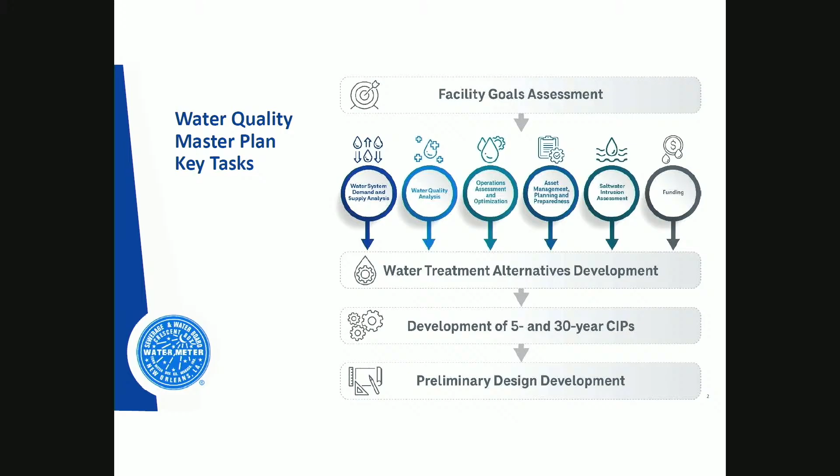That is near completion. And then part of their task, which is going to extend out probably through 2026 for CDM Smith, is to help us with some other preliminary designs that we choose if we need their assistance to kind of help guide us towards, hey, there's something we want to do, for example, with the lime systems, if that's how we want to move forward with it.

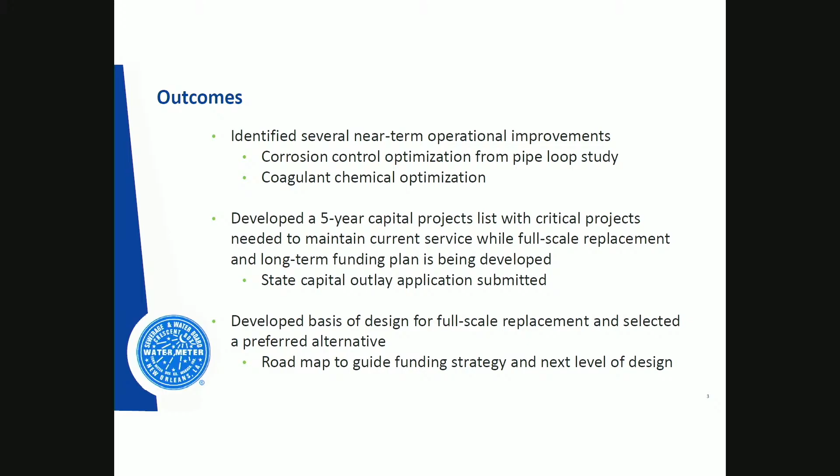We've already identified a lot of these things. I know Steve had brought the pipe loops to this committee before about corrosion control and how we can optimize what we do with the plant, and then develop the 5-year capital programs, like I said. The roadmap is going to be challenging because of what we need to do overall.

But going back to the pipe loops, in the laboratory upstairs of the Carrollton Water Plant, we set up 24 different pipe loops to study what effects increased chlorides had on actual lead service lines and different materials. This was mostly in response to the saltwater intrusion event we had a couple years ago, and how those things would have impacted us, because that was the unknown at the time, right?

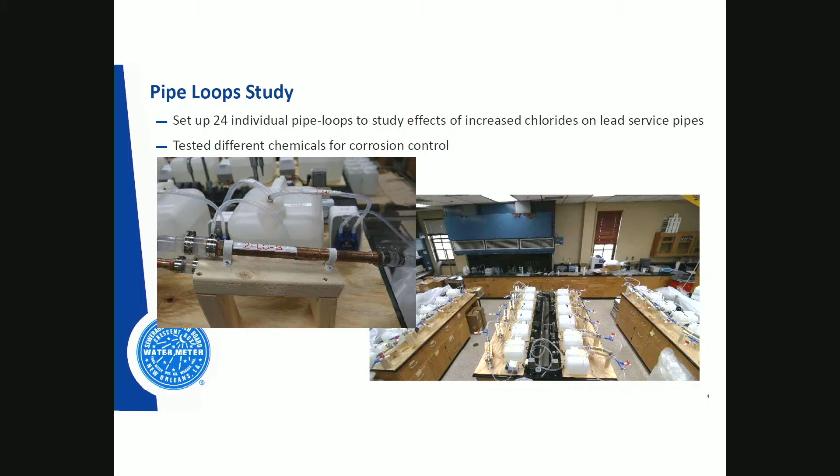If chloride levels increased in the river, what happens to our lead service lines, among other things, but that was the big unknown. That's not something that there's really a big test case for in the country. It was a bit of a unique situation for us. So we are able to test different chemicals and what those responses are.

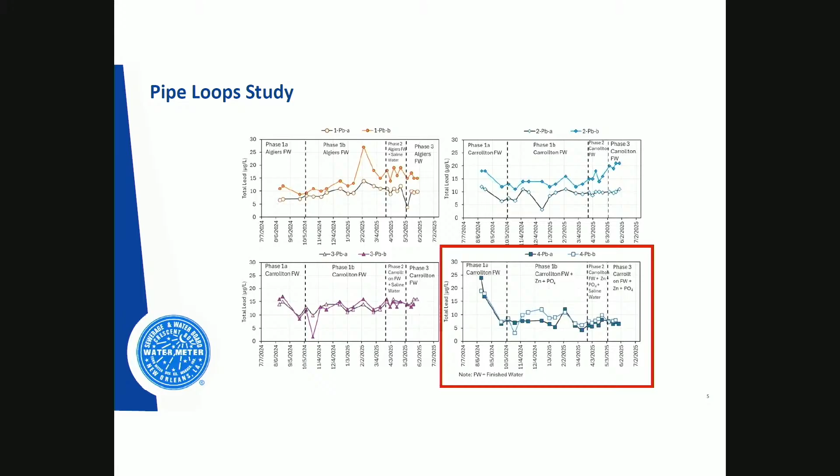The transmittal that came back from this had a lot of graphs. I'm going to focus on this one that I highlighted here because it goes into the addition of zinc orthophosphate. I know this graph can look a little scary because the numbers are very high at the start. There's a big asterisk there that it starts very high because we just disturbed an actual lead service line, right?

That's the biggest trigger for an increased lead level on a test - if you disturb the lead line, lead's going to be in the water. So you needed a couple months of a baseline for that to come back down, and you can see it jumps around. And the big initiative that is getting recommended is the addition of zinc orthophosphate. You can see that in phase 1b where it kind of stabilizes after a few months.

So the way zinc orthophosphate works is it creates a bit of a corrosion barrier. It creates a coating inside the pipe, but it takes a long time to start activating and building that. You can really tell - these graphs ended after the middle of last year, but if we continued it a little bit longer, it really stabilizes.

And you can really tell that what was important about this test is after adding the saline water, increasing the chlorides, it didn't jump up dramatically. So again, this is in a bubble, right?

This is one pipe loop. It doesn't actually reflect necessarily what we see in our system. So seeing these numbers jump above the 10 micrograms per liter level is not an alarming thing for us when you talk about the entire system, but it's really just a test case to prove that zinc orthophosphate can help stabilize that.

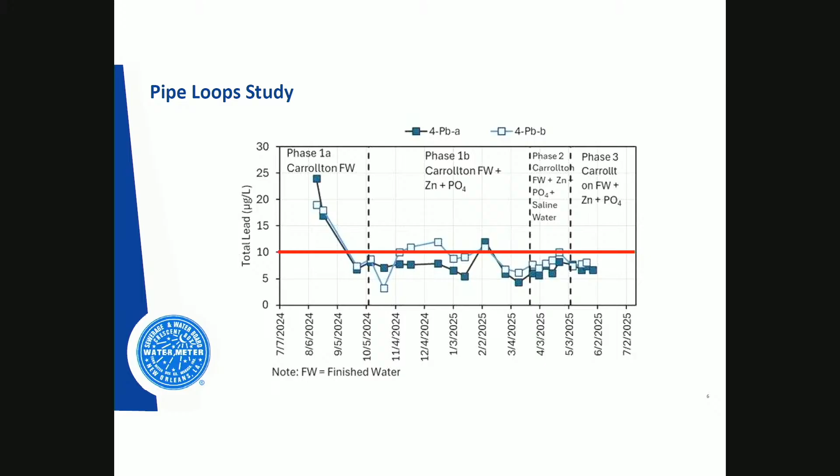It would be an additional chemical to our existing corrosion control, so the good news is we're not an early adopter for this chemical. A lot of utilities use zinc orthophosphate, it's very widely used, approved by EPA. But the costs are fairly dramatic. In Algiers, it would not be that impactful at $115,000 estimated, but $2.2 million yearly for our Carrollton treatment plant for additional chemical costs. So that's just something we have to budget for.

There's no return on it in the short term. It would be a long-term benefit if it helps us prevent breaching that action level in the future. So there's almost like undefined benefits there.

Did we investigate switching strictly to zinc orthophosphate, and then we could do away with the chemical we're using now, or would it be a swap? Oh, so it wouldn't be both going forward? Yes. We're already adding orthophosphate, so this is a different concentration, and the addition of zinc is what helps create that protective barrier. So we're already doing corrosion control, it's a supplement to what we're already doing. I see.

I do just want to reiterate that this is very much a proactive, forward-looking measure. We are not exceeding the regulations either presently or in calculations for the future. I just want everybody to be very clear on that. This is something we would be doing as a proactive measure to reduce the potential future risk, particularly in the event of a saltwater intrusion event. So just to be clear on that.

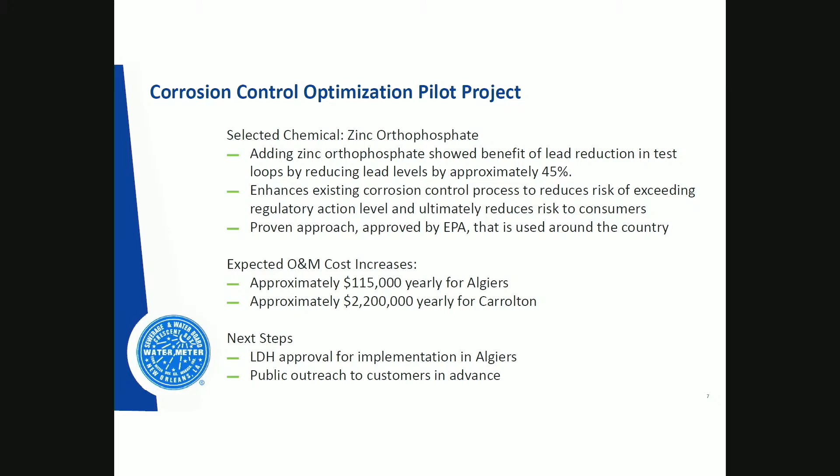All right, I did want to make a note. We've talked about public outreach, and our team is working on that. I don't have anything of our own to share right now, but wanted to put some examples of what other utilities have just straight up on their website. So Providence Water and Pittsburgh Water have been doing this for some time, and they have a lot of information. So, public website, updating our website, doing some press releases, some public campaigns. We want to make sure everybody's very aware: this is safe, this is not changing the safety of your drinking water. We want to make sure everybody's aware of the situation. So we'll be making sure we have a robust messaging campaign around that.

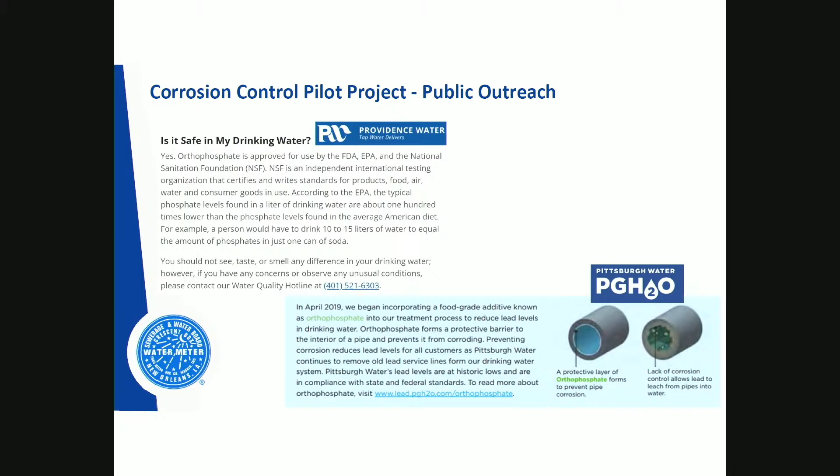Yeah, that's great. I have a video from a utility in Canada, I think, that uses orthophosphate and shows the concentrations of it in different food items and things like that. So I can send that to you as well. Yeah, like Providence, I have an example of 10 to 15 liters of water equal to the amount of, like, 1 can of soda. It's really useful.

All right, so as I mentioned, the main objective of this water quality master plan was the development of these CIPs. The short-term one was developed, we had it in our 2026 capital budget. The 30-year was more focused on the treatment plants themselves. It's a 110-year-old facility, so what do we do over the next 30 years to start pivoting that, because it's inevitable at this point. So what they did after their full analysis of the entire plant, all the equipment, everything, came to us and brought us 5 alternatives for different options of processes and how to do it within our existing footprint.

One of the things that was noted was that our sedimentation process is frankly not big enough as it is, even though those of you who've walked that plant know those sedimentation basins are enormous. They're still not quite to the size that they should be for our level of treatment. So that was, for example, one of the alternatives. Instead of going to traditional sedimentation, there's other options. There's a technology called Actiflo, which has a very, very small footprint, and plate settlers, which is another passive-type alternative.

So they brought us all these, and a layout of the plant of how that would look and the phases to get there, and then the different filtration options we'd have, because those post-disinfection options change based on how you start the process. So as we went down the line, it did kind of cross out some options as you make a selection on the first part and move forward.

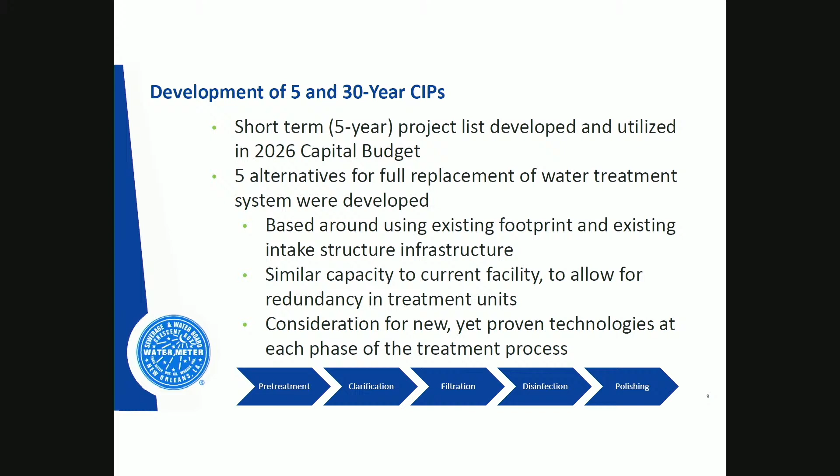So we were brought these 5 alternatives. We had a scoring process based on all these different categories, and we got to weigh what was most important to us. Treatment performance was, frankly, every treatment option brought to us gave us the performance we needed, it was all going to give us the proper water quality in the end. But what was important to us, and especially to operations, was O&M costs and then reliability and maintenance moving forward.

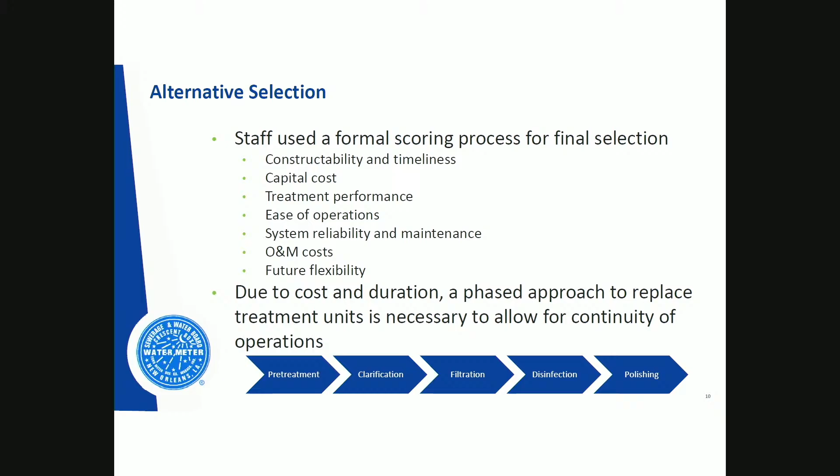The capital cost was important to us as well, knowing the reality of trying to fund something of this magnitude, which is ultimately going to be over $1 billion. A phased approach was going to be necessary. Let's start with the first part being the sedimentation, which some of us believe is at highest risk of failure at the moment, then move to the next part, and the next part, crossing that bridge as we get there.

We selected the alternative for plate settlers. It's a faster pretreatment than what we have right now, and it has a smaller footprint than we have right now. That's important.

The challenge ultimately will be, how do we build a facility of that size? Even though it's smaller, it's still going to be large, and we still have to keep our existing plant running. That's going to be the biggest conversion point here, because you still have to use the downstream parts of it to do that. So there will be some reconfigurations of the Carrollton plant.

Right now, our goal is to put out an RFP to solicit a designer this year to start this pre-design part. What CDM did as part of this task was more of, here are the technologies, here are your options to fit them in based on it, but it was a very high level estimate and idea behind it all.

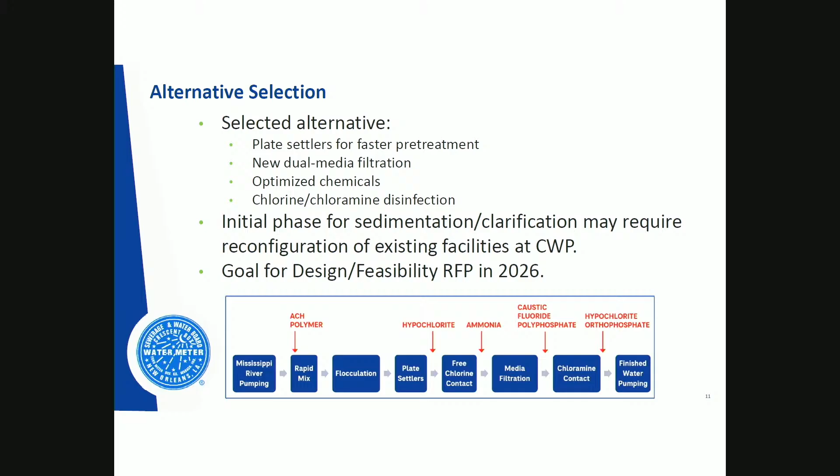By reconfiguring it all, you end up having a much smaller footprint on sedimentation and pretreatment, allowing you to use the rest of the existing facility to build a new filter gallery on top of that, so that you can keep your existing filter galleries running. We can keep our existing contact basins in place while that's being constructed.

So once we get past that sedimentation pretreatment phase of the new construction, future phases should be a little bit more - I won't say easier, but a little more tolerable - in that you've gotten past that first stage and now have some breathing room from a site standpoint.

So you would be flipping it, so you would do sedimentation, then filtration, then contact basins? That is the alternative we selected.

So then in the final product, the contact basins are covered. So that you wouldn't have to do the filtration afterwards? So you wouldn't have to, right. There are some caveats there - we have to ensure that we're not...

Right now these current basins have to be uncovered because we have to dredge them - because they're pre-treatment, pre-filtration. We know there's some lime dosing going in there as well that we have to get out. So post-filtration allows you to cover them completely, because there should be no extra sediment getting in there.

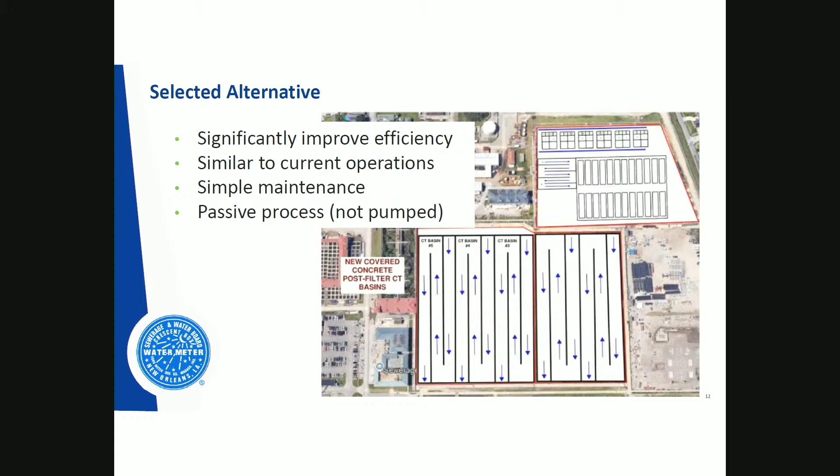So for 2026, what we talked about, we do need LDH approval to start implementing zinc orthophosphate. We will start with Algiers and then move over to Carrollton, because Algiers is frankly a very small initiative, especially a tote and pump, dosing pump.

Part of the master plan also highlighted some efficiencies we can do for the coagulation process and reduce our need for lime for pH control. That would be using ACH to replace the ferric sulfate we have. It ends up being a much smaller dosing, which reduces our need for lime, which we've seen has been getting into our contact basins. Hopefully we can make that change over the next couple of years.

This also requires LDH approval. Is there a cost difference, or is it just sort of offset? It would eventually offset. So essentially what you're doing is swapping over a year's period, and then you can start reducing your lime as you see it needed.

I'd mentioned the RFP for the Carrollton Water Treatment Plant design feasibility study, and then this 5-year CIP. I know it went over that quickly, but there's a lot of items in that 5-year CIP that are, I'll say, urgent. So this is more the things we need to stabilize the plant and continue to operate, rather than new things.

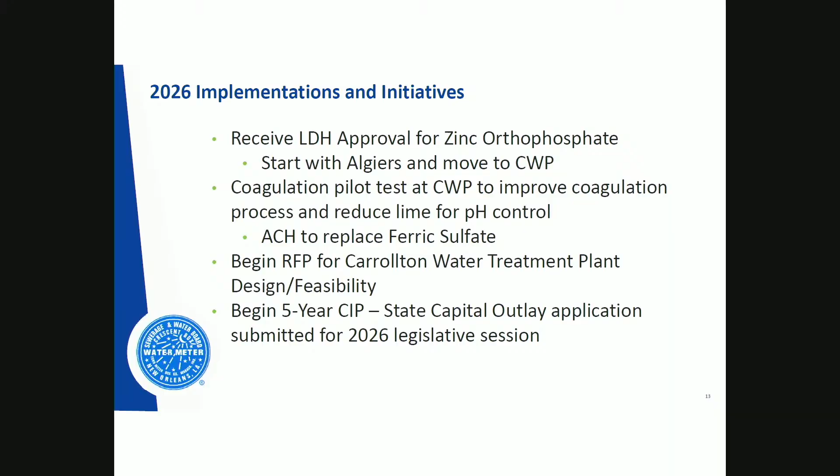You done? Questions? Yeah, before we end on that one, I think I'm understanding that this was less a formal plan document that was produced and more a series of documents that the consultant provided. Is there a plan to put those into a single document that we can adopt as ours? There is.

Even though the alternatives have been selected, we've got our final transmittal for the alternative we did select, that still builds into the 30-year CIP. So that is not quite done. I expect that to be done in the next month for our internal staff review, and then it gets finalized into a final transmittal document. Once that's done, that functionally completes the plan, and they will create an executive summary, and then we can package it all together and formalize it and publish it.

Great. So that'd be maybe beginning of Q2? Probably summertime, I'd say. Because ultimately it's those 2 documents, a CIP for 5-year and 30-year, referencing all the other transmittals that help build into it. And then the plan itself stays, we'll probably bring an amendment to extend out to the end of 2026. Even though the plan would be done, those pre-design items are still available to us as a task order for them.

And then the pipe loop study, I know there was some work about that with the Water Research Foundation and other partners. Is that complete or is it still ongoing? I believe that work is still ongoing, and Chad can correct me if I'm wrong, but these are multi-year projects that the Water Research Foundation is doing. We are participating, I believe, in at least 2 that will be sharing our data and can help nationally.

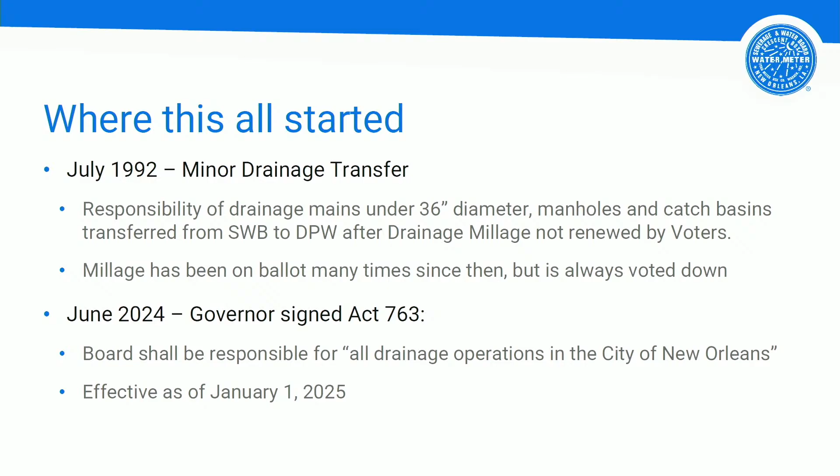Then coming into 2024, the governor signed Act 763, which brought back the minor drainage system to the Sewerage and Water Board, effective as of January 1, 2025. I have to point out that on January 1st it was pretty hard line for DPW — they were very happy just to say it's yours now. Everything was just given to us, and they closed the books and were done with it.

Our new responsibilities: we received 1,600 miles of these smaller drain lines under 36 inches in diameter, 50,000 drainage manholes, and 76,000 catch basins. The existing responsibilities we had were the 210 miles of closed canals 36 inches and above, and the 65 miles of open canals.

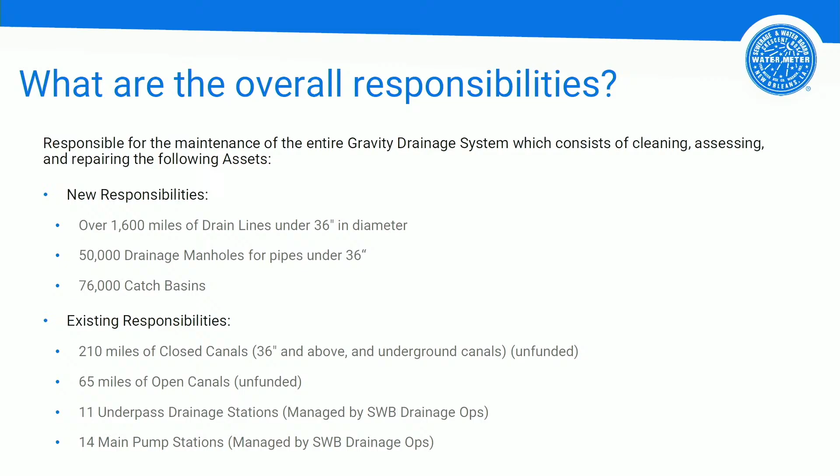Those are both unfunded — we haven't done much in that area either. We have the 11 underpass drainage stations and the 14 main pump stations, and those are managed by our Drainage Ops Department.

DPW transfer engagement — I'm trying to follow the format you put together to answer your questions. We received 9 flush trucks, with 5 of them being functional. We didn't receive them until early March, and those were 4 Vacons, not too old of models, but fair condition is putting it nicely. We've had to put a lot of maintenance into them and furnish them up with all their tools. The Vactor is a good working truck.

It's actually in the shop right now. If I had to say something why I only have two crews working for me right now, it's because our equipment is not very reliable. So I only have one vac truck working as of today. Hopefully by the end of the week I'll have 3. So it's a little tough.

Inventory received includes catch basin assemblies, drainage manhole tops, and inlet grates. We put in our capital purchase for this year, and the only thing we really got was a crane truck. So we're using the crane truck to go get the inventory from DPW. Support Services helped me out a little bit with grabbing some of their inventory.

Part of their ARPA funds, they had $10 million. They spent about $7.2 million, I think, on cleaning, and the rest in engineering, but $100,000 was put aside to purchase catch basin assemblies. So we're grabbing all that. We've been doing it pretty solid for about a week now, so we're really kind of filling up our yard. I'll have a final count on what we've received probably in about a month.

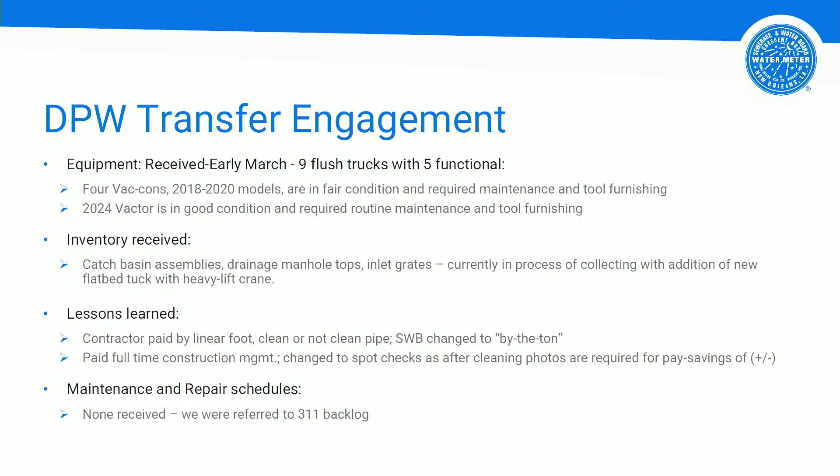Okay, so quick question. At what point do you all speak with legal to make sure that our standard, in terms of the contract, moving from the linear foot model, is set, so that we have a standard when it comes to RFPs that go out?

Or are we doing this? We didn't meet with them internally, we just did it within my department. I mean, legal sees what we do, but I'm not sure if they were aware. Before the contracts are executed, it goes through legal. I'm not sure if they were aware that I changed the format. I might have told them, but I just want to make sure we're connecting with legal, so that going forward, this is a standard.

Mary was very heavy at the time into the transition. Okay, so yeah, I guess you probably saw that. We pretty much, the departments pretty much connect with us when we are doing things of that nature. I'm not sure if I'd mentioned at one point, but they look at the whole contract.

So afterwards, was there any pushback once you changed the terms, or were these new contracts going forward? We had an RFP out, so anyone bidding on it knew what our terms were. So there were no issues there at all.

And then the reduction of the construction management, that's new in our RFPs? That's on the engineering side.

And we'll look further down, it depends on my funding this year. Actually, that'll be in-house, and I have a construction manager in my department now, and he'll just spot check internally with us. Okay, thank you. Good questions.

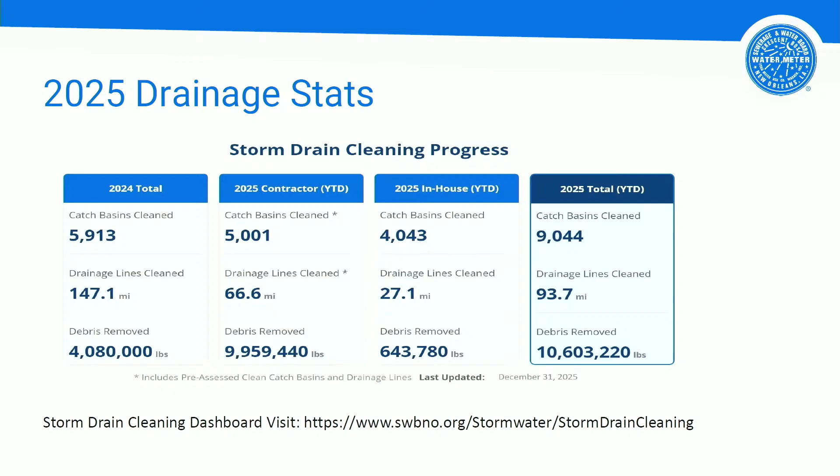We cleaned 6%. What was theirs? Almost 11% when you look at their drain lines cleaned. So together, the 2-year total is about 17%. So in 2 years, we haven't met the industry standard. The goal is to meet the industry standard, right? That's the goal, yes, absolutely.

Yes, and that's our goal. It all depends on the funding, how my routine goes. But of course, I'm going to try to go back through the areas as I finish 100% of the system. I'm going to go back to what I started first.

How quickly do I do it? Current schedule, I'm doing it every 13 years. It needs to be every 5 years, 20% a year. Previously they had PSAs going out talking about residents cleaning their own, and it's just like, what is the actual schedule of maintenance?

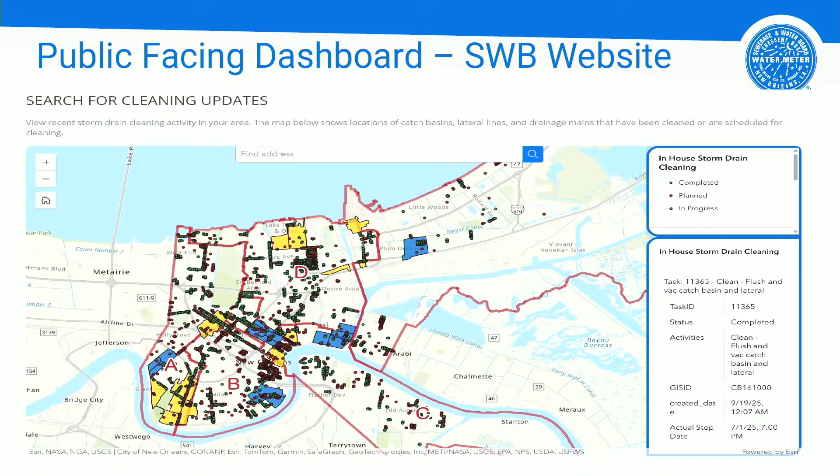But I understand what you're saying. I think it is important to note, though, that it's still important for residents to clean in front of the catch basin. I try to keep mine swept every time I see leaves or trash in front of it, because the more stuff you can keep out of it, the less often we need to come in and open it.

Because if you told me clean my catch basin -- oh, do I get in the curb, that's the gutter, that's cleaning the gutter. The catch basin, we're never gonna come out and say, okay, clean your own catch basin. That's too much of a risk for us. But cleaning the curb, yes.

Gotcha, and picking up your grass clippings. Plus, you would not be able to lift. Yeah, really, that's actually a really good point around the community engagement. I know the time that I've been here, I don't recall any push or nudge or flyer that says, hey, remember, you need to get out there and clean it. So maybe there's some low-hanging fruit there to get community engaged.

I actually have a strategic question. Any particular strategic risks presented by this consolidation that didn't exist when these two entities were operating, or this was sort of split? Not that I'm aware of, no. I think we only see opportunities, right, at this point for us all to have the entire drainage system under our roof.

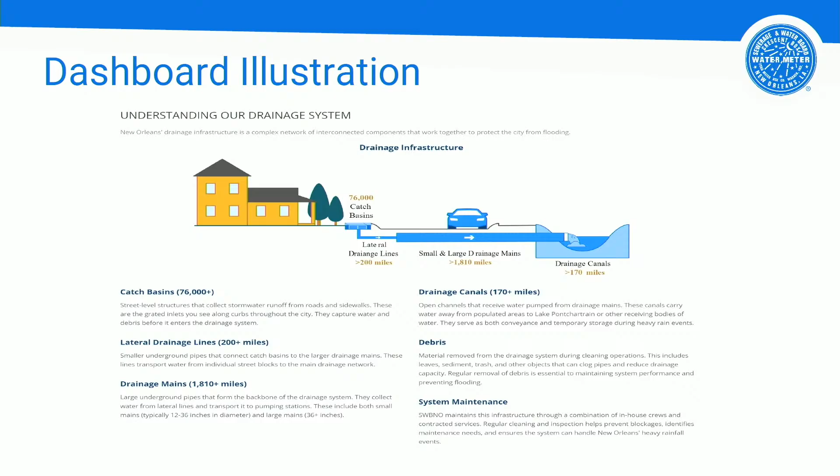Yeah, and I think to that end, as we're advancing the complexity of the program we're creating, we could start thinking about certain times of the year -- for instance, when the live oak trees lose their leaves -- to send out a bill insert or an electronic notification to customers on the portal saying, hey, right now is a really good time to sweep in front of your catch basin. We've discussed that.

I received that one-time CNO ARPA payment, I believe that was in March. And then in April, I didn't start receiving funding from the IMF until April. Important to note that. The contract for CS is $9.3 million, so I was putting out smaller couple $1 million work orders at a time as I received money.

So we did receive the one-time CNO ARPA funding, but originally I thought I'd be having $18.9 million. In May, that was revised. The traffic cameras came down.

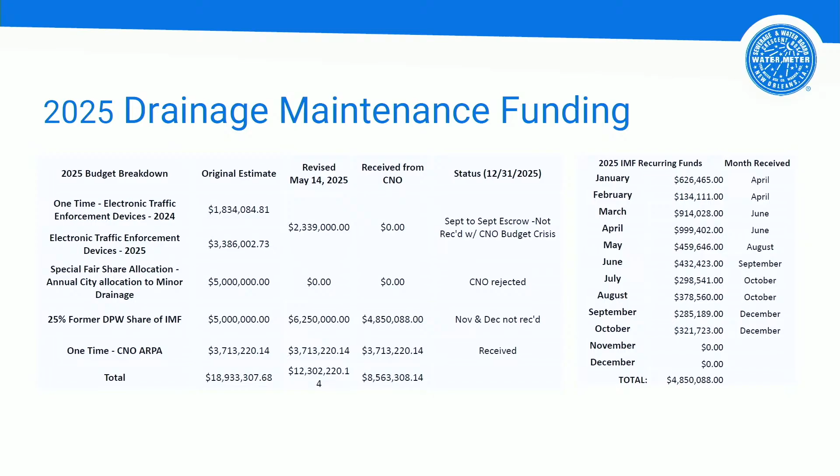Okay, so received to date, roughly $8.5 million. Let me go to our expenditures. Salaries spent to date, with the contractor for cleaning, is roughly almost $6.4 million. I have $7 million in work orders out there, but I've stopped them at the moment. The contract is for $9.3 million, and it's an RFP, so I can fluctuate that.

Contractor repairs, I'll talk about that now a little bit, I have a future slide on that. $750,000 for consultant All South, we spent $500,000. Consultant IC Change, $123,900. Capital would be my lift truck and some other Zoom camera and other pieces of equipment. Other O&M spending, it was pretty pricey fixing up the vac trucks, a lot of repairs to the vac trucks.

So income IMF, income ARPA - I've expended to date 8.8, income 8.5, so I'm in the hole right now about $246,000. But I haven't received the November and December funds yet, and that'll take care of that. Then we'll take it from there to see when I can start the contractor again.

Funding scenarios - I just kept the $8 million in there, that's kind of what I see this year, what I'm getting this year. Then looking at if I get $10 million - industry standard is that third line, in-house plus contracting percentage. If we're looking at industry standard, if you go down to the 20 million and 25 million, that's when I get in the area of providing the industry standard.

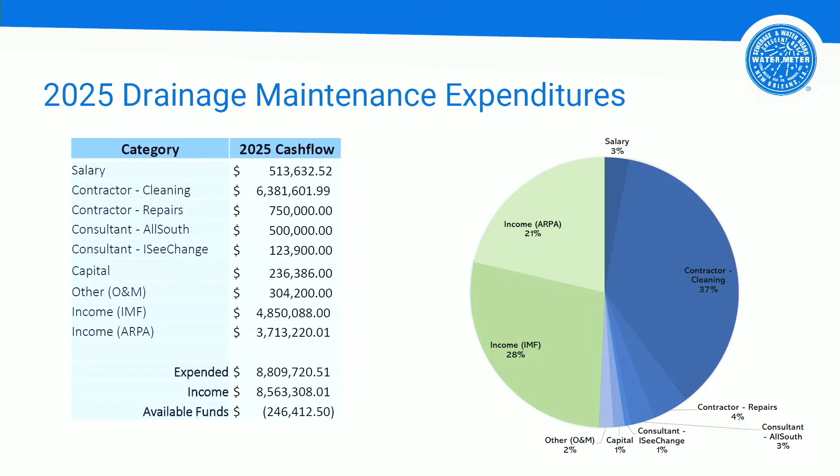Yeah, and it is good. Obviously, the way I look at it, I have 3 engineers myself on staff, we can do more. I think it'll get better, our numbers even look better as we get more equipment and stuff. I don't need to add more engineers. Right, and that's what I'm saying - if you go to the next slide, $1 million worth of contracting equals 1% clean. But what is the price for the 1% for the in-house cleaning today?

Yeah, and it shows 1%, and actually we're hoping that our crews are efficient enough, and as they get better at it, they're doing 2% a year per vac truck. That's our goal, and that's actually the in-house goal. If you want to be an operator 4, they're currently operator 3s, you need to show me the 2%.

So that brings up an important question I wanted to ask real quick too, about as you're building your team - are you finding that you have the classifications necessary for all the work that you need to do? We've worked it out, we've done all that, looked at creating new job classifications.

Yeah, we've gotten it done. Javier's done a great job on that side, that was on his end, and if he was here I'd have him talk on it. But we're set - we are in a good spot, we're ready to move, we're ready to put people in.

We just need the funding, and we can get the people. There's been people that I've had to say, I'm sorry, I don't have the money to hire you - some good people. There's a couple of people at CES that wanted to move on, they wanted to come on, good equipment operators. I just can't pull them in, and then they're sitting around doing nothing - I have to have equipment for them. So I think I can still find people, it's tough to see the good people because it's very hard to find the good people. I won't go into all that about how tough the hiring is, but I can still find them.

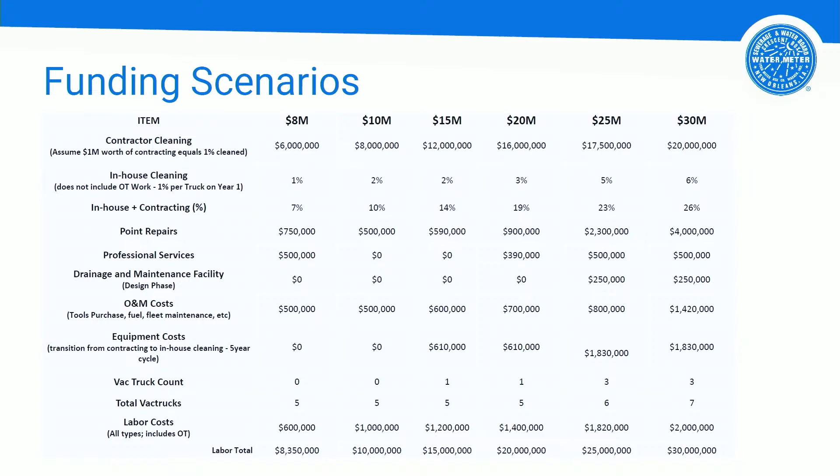I'm running long, so let me run through drainage repairs. I spent $750,000 on point repairs. I originally had this money put in place because I had performed a lot of inspections in the major drain lines and the bigger box culverts.

From my opinion, the number one issue with the drainage is at that point where the minor drainage meets the canals. What happens is our major canals, our big canals, are pile supported, so they don't move. The pipes coming into our canals are not pile supported, so they're subject to soil differential settlement. Many of them have dropped out, fallen out, sheared off. That's why I had the $750,000 set aside for that.

I didn't complete one of those repairs, not one. What happened is safety issues took over - safety issues that DPW wasn't taking care of came to my plate very quickly. But I did complete 11 drain mainline repairs and 29 manhole catch basin repairs that were all safety issues. So that's where that money went.

A general note: as we repair pipes, this is going to reduce the frequency of cleaning, because within your equations for velocity, for fluid flow through pipes, velocity is a major factor. When your velocity slows down, those suspended solids settle, and that's what settles in the pipes. As you fix pipes, the velocity continues to move, so you keep moving the material. As we repair pipes, less cleaning will be required.

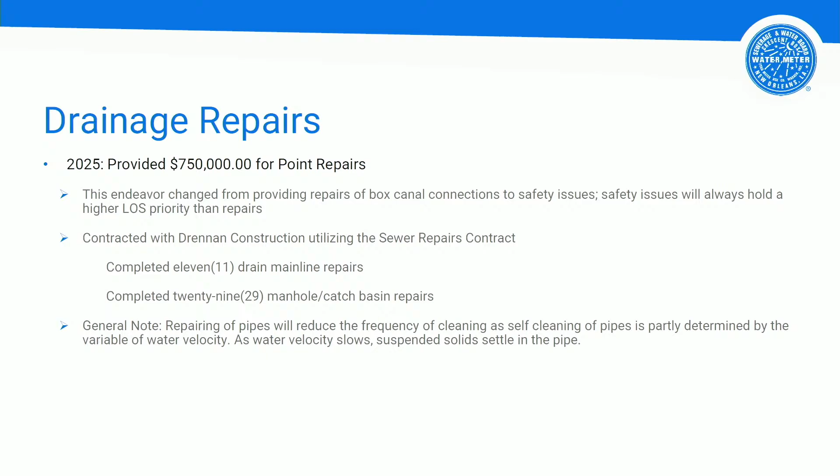So it's going to be really important in the future for us to really focus on cleaning the pipes. That's just a general note I had.

And how are you making the determination when cleaning is not cost effective and it's time to repair? That's based on our inspections - our Zoom inspections. I have a quick case study I'll run through with you.

Drainage maintenance department training - our vacuum truck operator training - we have a consultant, Nezat Consulting, that has these training videos, and it's 8 hours of training. They go through that, and then we do in-house training with some of the networks people. We also have them go out every now and then, and we'll start this up again when CES goes out. I'll have my crews go out with CES and look at the way they do things - proper nozzle selection, step cleaning, depending on the type of material or degree of debris in the pipe.

That last one, the repairs of catch basins, should have been in the flatbed operator training. We got a flatbed truck, which is really nice, so we've been replacing a lot of catch basin and manhole covers with that. That's really been great - mostly all safety issues.

Next month we'll start masonry work to repair the catch basin and drainage manhole structures. We're trying to get masonry mortar mix in a 5-gallon tub that they can just take to the site, put it on top of the catch basin that's already there, put the frame in place, put the top on - done. Big improvement, so we're working on that.

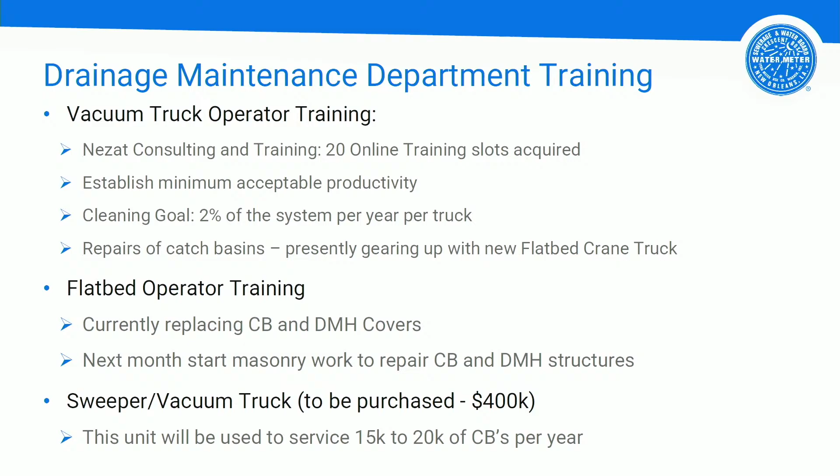We'll have that. All right, let's see, future expectations. I'd love to see us funding independently. I think we still take the IMF funds, but it would be really nice at the Sewerage and Water Board level to have a drainage fee. That's, I'm going to say, the only way we get to the monies that we need. Aim for the industry standard of 20% of assets cleaned yearly. Develop the KPIs with the new asset management system, key performance indicators that you asked about.

It's tough to distinguish the contractor costs and our costs right now. I think I could do a day rate, like what's the day rate, I could work on that. But it's pretty close to what we would see on the sewer side for cleaning, and we're always two to three times cheaper.

Citizen responsibility, that is cleaning 1.5 feet past the curb line, elimination of grass debris from entering the drainage system. I do have door hangers that are going to be made that my crews can use. If they go clean a catch basin that's really dirty, they can put it on the door.

Create a repair division within the department. That's future. Yeah, I actually have quite a good amount of people and networks that would love to do this work, and I'll talk to Steve about that at length.

Clean and repair the major drainage system, I'll show that in future. My hopes are, where this is all focused on the minor drainage system, I'd like to clean the major drainage system also. I did a lot of inspections in the major drainage system, probably more than anyone else, so I see the issues there. I dropped into the Claiborne Box Canal, the brand new one, last week, and there's 6 to 10 inches of material throughout already. Be nice to figure out a way to get in there and clean that.

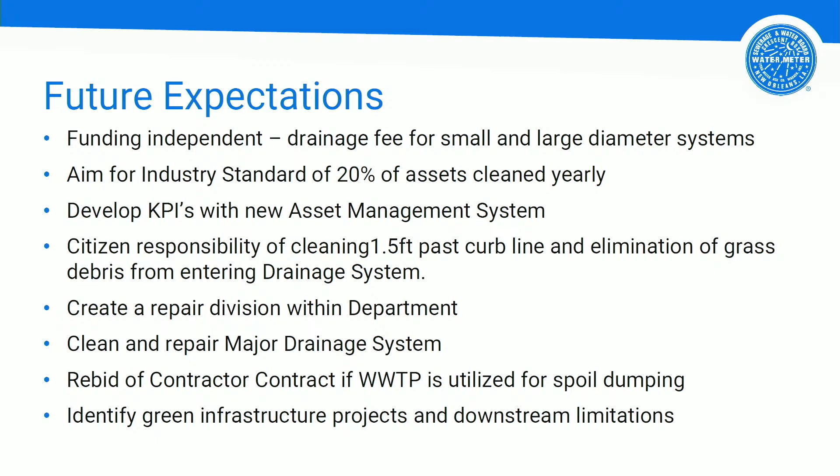Internally, we need to identify the green infrastructure projects and downstream limitations, like I talked about before. So I think that's important to do internally.

Dave, I just want to highlight that. I think that's one of those opportunities we were speaking of earlier, being able to take everything together and look at it as a whole system, right? Yeah, the whole flow from the catch basin to the pump station. So I just wanted to highlight that as one of those particular areas.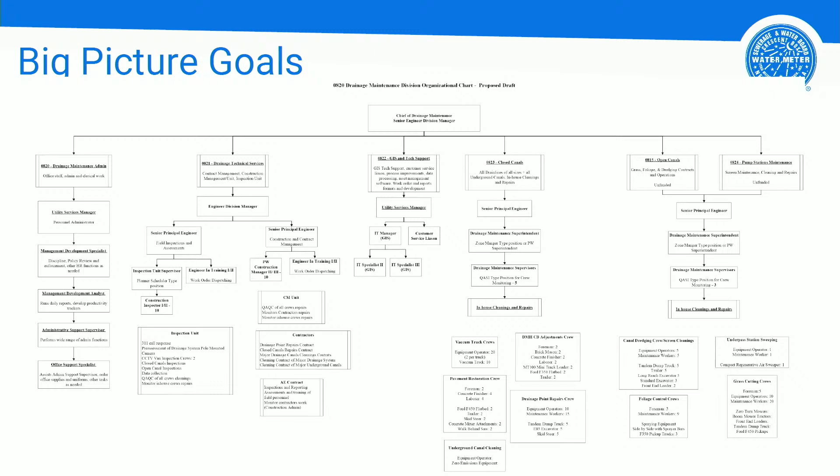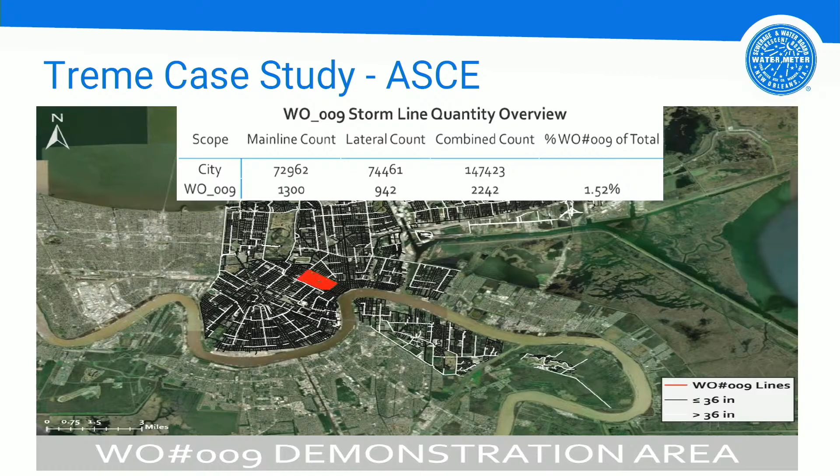Okay, hey, I know I'm running late, let me go through this real quick. We did a quick case study with All South Engineers. This is the Treme area, as you see in red, it represents about 1.5% of the system. They went through and zoom cameraed the whole area. What do we have, I wish I had a pointer.

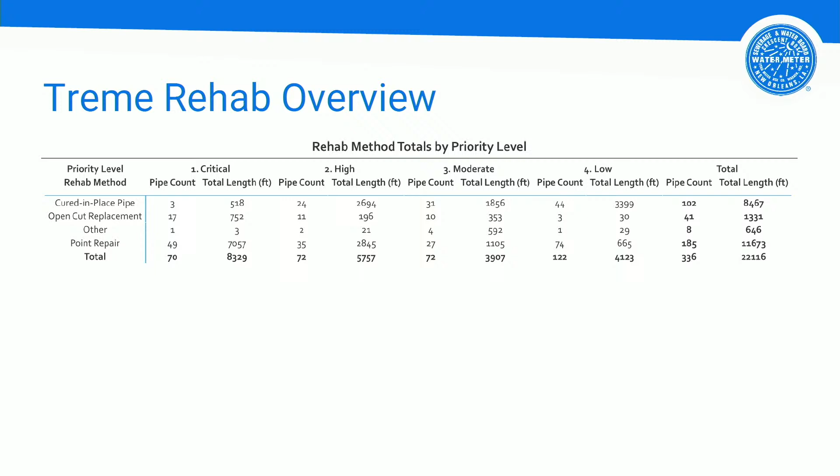You have critical repairs, high repairs, moderate repairs, and low repairs. Total repairs they've seen in this area is 336 total repairs of the pipes. Total length of those pipes is 22,000 linear feet. So this is damaged by pipe size and priority level.

And if you see the priority level, the pipe sizes are like the 8-inch, 10-inch, 12-inch, 15-inch, 18-inch, and then you have critical, high, moderate, low. Where I would start, if you see those 13 in the critical-high that are the 24-inch and 30-inch, those are probably my most critical because they're the furthest downstream. Probably start there, I'd have to look at it a little more.

Then damage by the pipe size also, and different types of damages: blockage, broken pipe, collapsed pipe, cracks, fractures, cross bores, infiltration, offset joints, partial collapse, roots, sag. There's a lot of different failure mechanisms there, and it's a lot to look at.

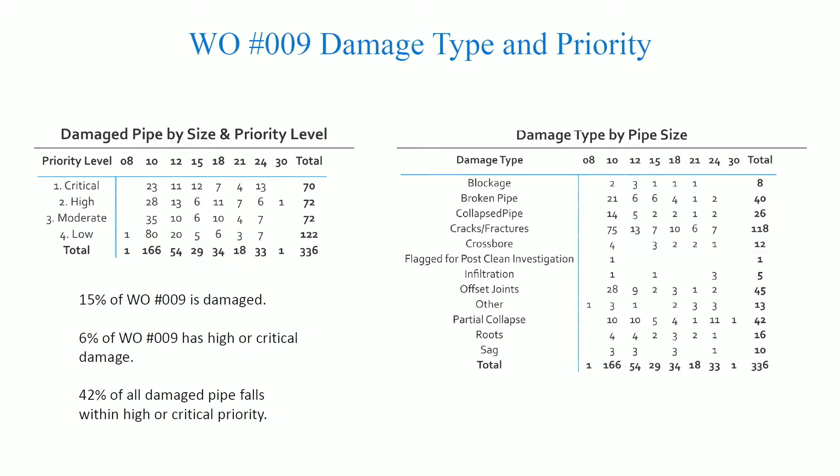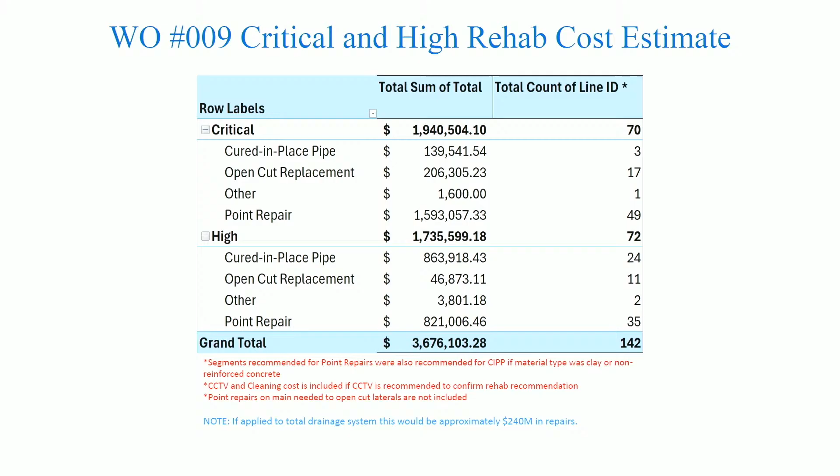15% of that whole area has damaged pipes, it's pretty big. If we looked at just the critical and high pipes, the total repair cost would be around $3.7 million for 1.5% of the system. So if you see my note at the bottom, if you applied it to the whole drainage system, critical and high could possibly be in the $240 million range. And I don't think, after 30 years of not doing much to the system, I don't think that's unreasonable. Yeah, it's a tremendous bargain for spending $0 for 30 years.

And just want to show y'all a few photos, cracks and fractures of pipes.

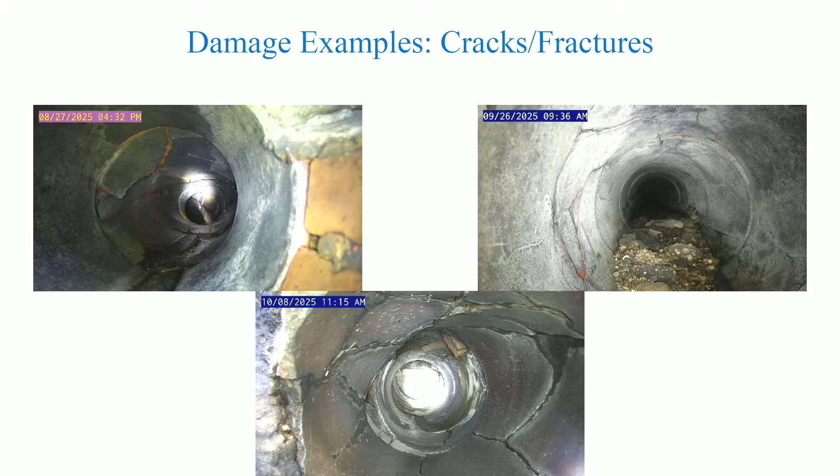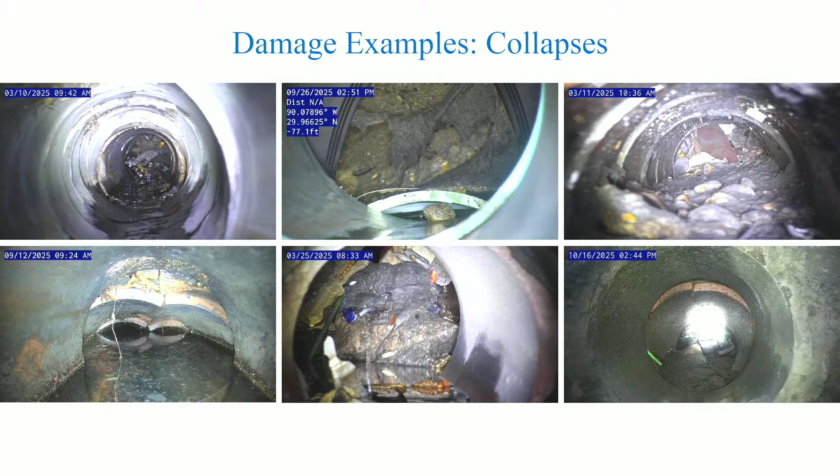Just general photos of damaged collapses, you see that. If you look at the top middle one, you see that type of collapse a lot at the intersection of our major drainage canals that are on piles, and the pipes coming in. And then partial collapses, where water's still able to make it through, but it's not in very good condition.

This is all in the Treme area, these are those pipes. I know I was with Mr. Heyman when we went to the community engagement, and we cleaned that area, but we're not even finished cleaning it. I think we still have about 25,000 feet of line to do, but they've noticed a difference just from the cleaning of that area.

I'll add quickly, that was one of the first community meetings I went to. One woman said she sleeps with sandbags by her front door because the only drain that works is right in front of her house. We used our strike team process that we're developing and went in a concentrated manner. When we went back about three months later, they were pleased with the progress we made, and it was appreciated. I think it shows that the strike team aspect works, going in a concentrated manner, and it made for a good relationship with them.

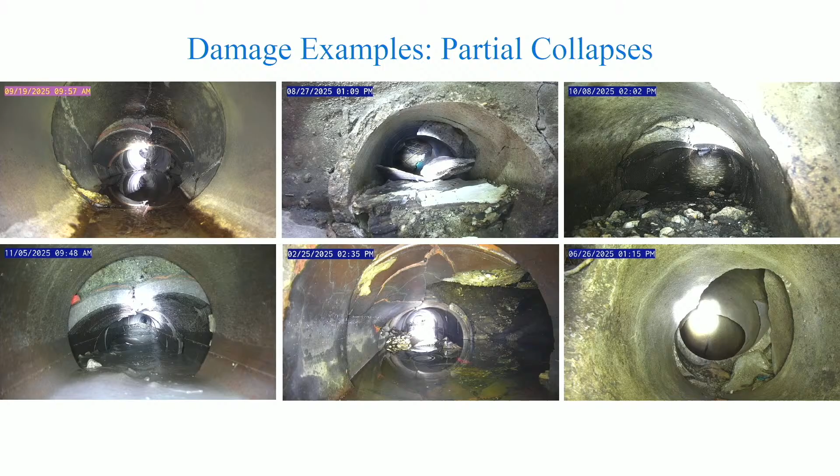She had sent me the information the next day after the meeting, because I was there also, and we jumped right on it. So it was nice to do that.

Good job. I have a quick question. During the aftermath of Hurricane Katrina, a lot of these pipes, not the ones pictured here, collapsed because of the weight limit of trucks on certain streets. Is there any proactive means we can have with DPW now, so that if you have recurring pipes that are crushing, we can get a weight limit, because sometimes based on what the street is made of and what's under it, we're continuously repairing those streets and the pipes underneath, so we could proactively get a weight limit on the trucks on that street to stop having to repair these.

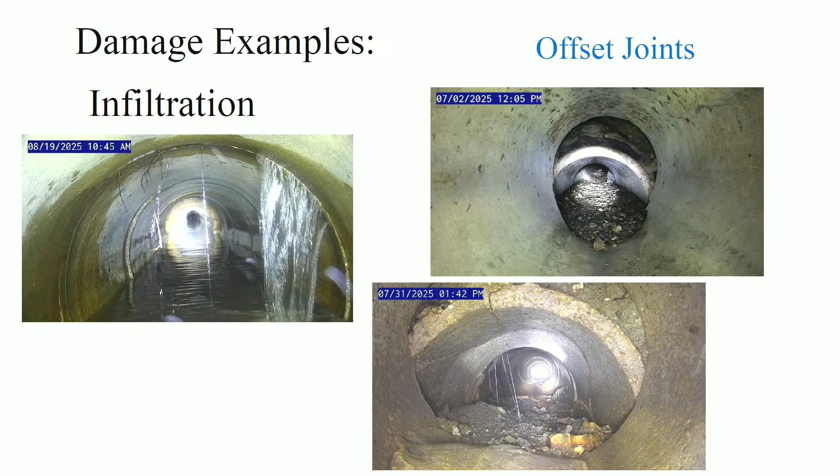That's a really good point, I haven't gone into that. As I inspected the entire St. Louis Canal underground, I saw the way it was built - the old structure with the brick arch, beautiful looking. But I think about when that was built and what the loadings were then versus design loadings. You always have safety factors, but I'm like, oh my gosh, this really should not be a bus and truck route. Yeah, I think that's something maybe we should look into in the future.

It's a great point, something that was in my mind when I was actually going through that canal looking at it. Like, wow, it's beautiful, it looks great, but I'm underneath and the trucks are rolling on top of me. How often do you have to continuously repair something when it just cannot support that load on a continuous basis?

Amazingly enough, there hadn't been any catastrophic collapses. In my thoughts, I don't know if it's a matter of time or not, but it's a possibility. Especially if you build the street and you're not removing it and putting it back at the same elevation - you're adding on top of the street, adding more dead load, and that makes a difference also.

Okay, I think that's it for me. I ran a long time. Thank you all, maybe I should apologize for that. No, please, don't.

This was very useful and tons of information. I think it would be great to see all of this collected somehow in a document that could be provided to City Council, the media, and partners - maybe a one year success story sort of document that we can use, and also help build the case for additional funding streams in the future. Well, it was supposed to be provided quarterly, I think, to the city.